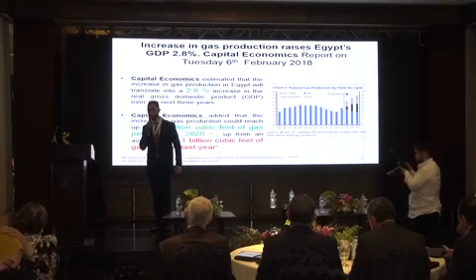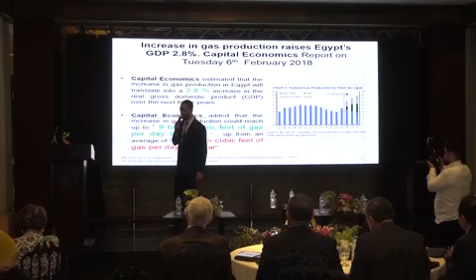From 5 billion up to 9 billion. This could be good news for you, but I will not say sad news, it is worried news, because if you have been awarded your fortune, you will spend all night thinking what I'm going to do with it to have the greatest benefit.

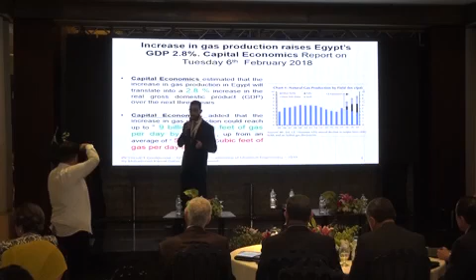So we will need an effective solution, not efficient solution, because you know the difference between efficiency and effective. Efficiency is doing everything the right way, but effective is doing only the right thing. This takes us to an introduction to the gas early production.

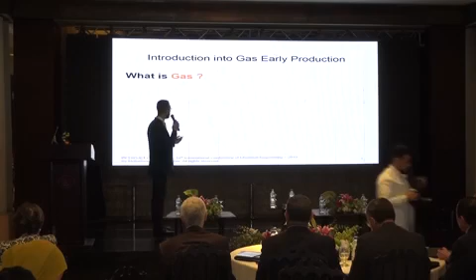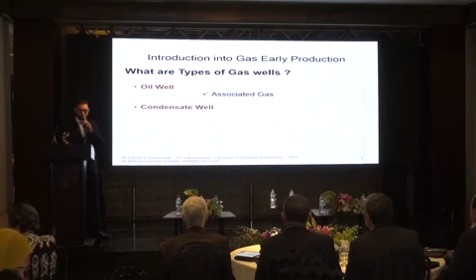Before going to the EPF, we need a small introduction, very simple, about the gas itself - its compositions, its definition, its classification. It's a mixture of hydrocarbons, between hydrogen and carbons, and it could be having some components. I have to also go through the types of gas wells, which are oil well, associated gas, and condensate well, non-associated gas, and gas well, pure gas, and also unassociated gas.

The examples of hydrocarbon components could be CH4, C2H6, and C3, and then going down to the lower and heaviest components, which are C4H10 and IC4. The gas could be classified, as we know, to sales gas, LPG and LNG, and NGL and condensate and removed substance.

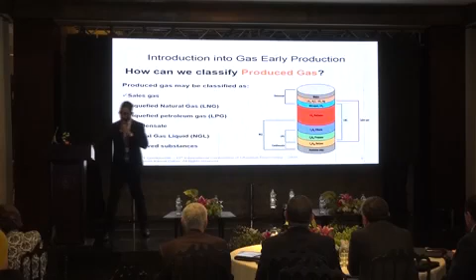The main gas components could be principal components, which are CH4, C2H6, and heaviest components, which are propane and butane. I'm reviewing these items because I will need them through my presentation, for how I'm going to separate these light components from the heaviest components in the most economic and fastest track.

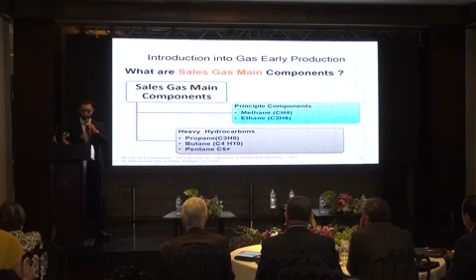The gas processing is simply separating the heaviest from the lightest to produce what is known as gas, as per the client specs.

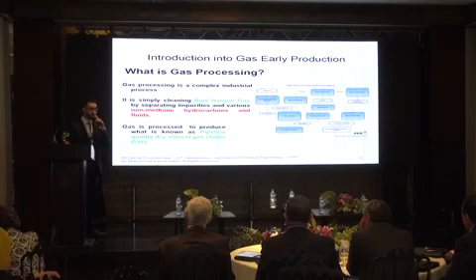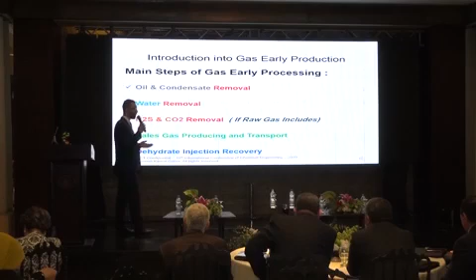The main steps are oil and condensate removal, water removal, H2S and CO2 removal if your gas is sour gas, and then sales gas producing and transport. Of course, there's dehydrate injection recovery, and all of you I think are familiar with the hydrate formation problem which we face when processing and treating our gas.

There is also the Cricondenbar, which is the highest pressure at which liquid and vapor phases could exist together at equilibrium. And Cricondentherm is the highest temperature at which liquid is formed.

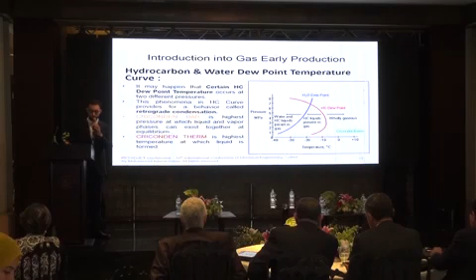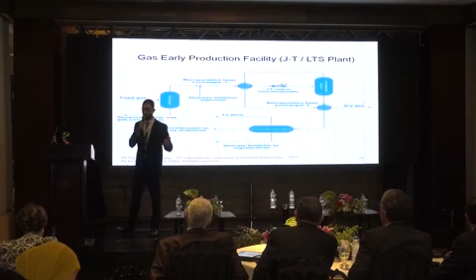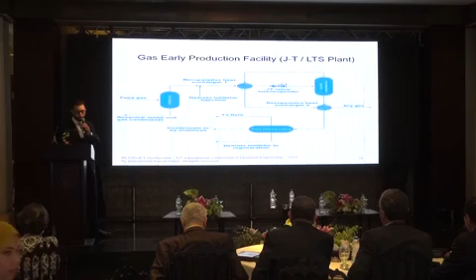So we are gathering some equipment which are skid mounted, as we see: high pressure separator here, and then injection point for the hydrate formation, and then we are having our JT skid.

JT skid, if you are not familiar with this item, it stands for the Joule-Thomson effect. The Joule-Thomson effect is an expansion valve that makes the gas suffer a higher pressure drop, and at this moment it will suffer a higher temperature drop, allowing you to separate the lightest component from the heaviest component through the low temperature separator.

You also have this heat exchanger which works for both targets: heating the separated heaviest components and also making the temperature of the gas reasonable, matching the EGPC gas specs.

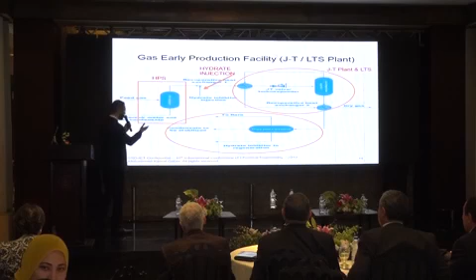Then you have the low temperature separation here for separating the heaviest components, and then the hydrate mixed with water is injected again at this injection point, flaring a small amount of gas. Then you have your dry gas.

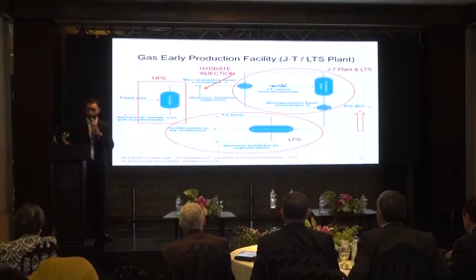This takes us to a case study done through the Unisim software. These were the composition of our gas, as we see here, and these are the conditions, along with the sales gas specs required by the client. Our challenge is to separate the light components, methane and ethane, from the heaviest components, and also to bring these conditions to the required specs.

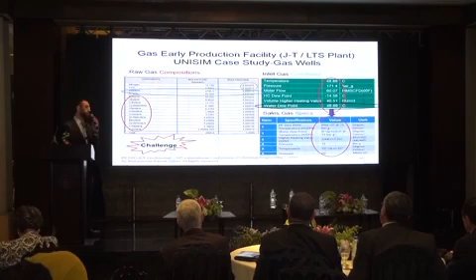The main target here is the dew point temperature of the water, which is around 50 degrees Celsius; it needs to be brought down to around 0 degrees Celsius, while keeping the heating value as it is. So let's do this together.

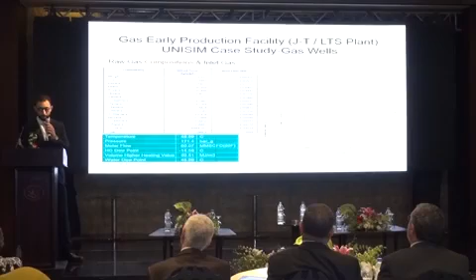These are the conditions and compositions. This is our figure, but keep in mind this figure was considered on a dry basis, so we have to do some saturation with water to make it more real. So this will be our starting point.

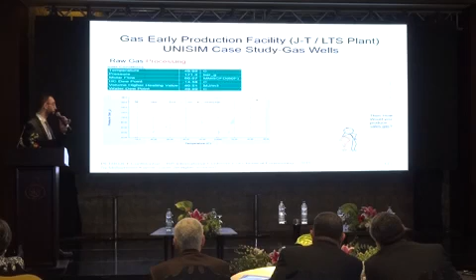We will first remove the heavy components, then remove water and prevent hydrate formation, and then produce sales gas. We do that by bringing this point inside the curve itself to create a two-phase flow, so we can separate the heaviest from the lightest, and then bring the operating point back outside, as we see.

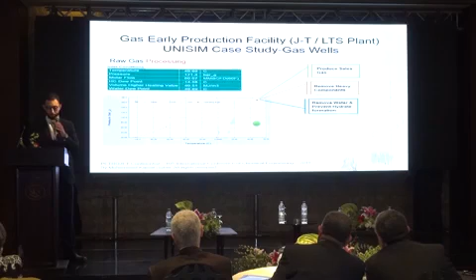So how are we going to do that? This is our process simulation, which is composed of inlet separation, and then you have methanol injection, and you have your JT skid, and then you have your compressor station.

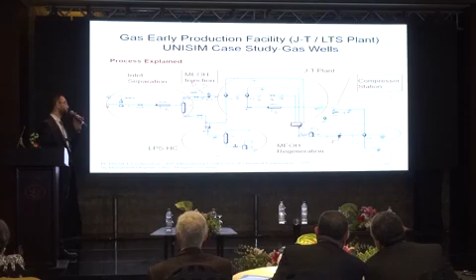The reason we have our compressor station, as I mentioned previously, is that the main phenomenon of the JT skid is to make the gas suffer a higher pressure drop. So you lose pressure, and you have to use a compressor station to match the sales gas specification.

And then we have methanol regeneration to be re-injected. We also have our heavy components, which have been produced through the high pressure separation and the low temperature separation. They are gathered, separated again, and then trucked to be treated further.

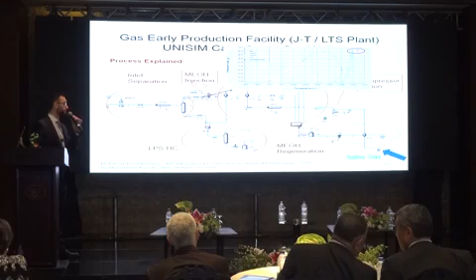Kindly remember the steps: we bring this point inside the curve, and then we bring it back. This is our curve, but notice that the operating point is so close to the dehydration or hydrate formation curve, so we will have to do dehydration to address the hydrate problem.

This is our formation temperature for the hydrate. It's around 18, a close temperature.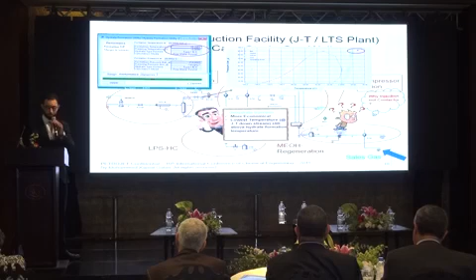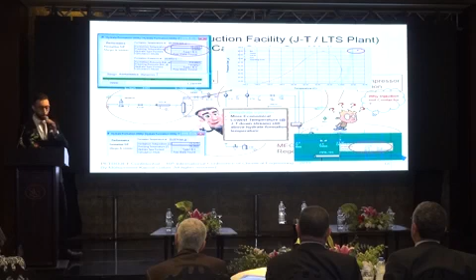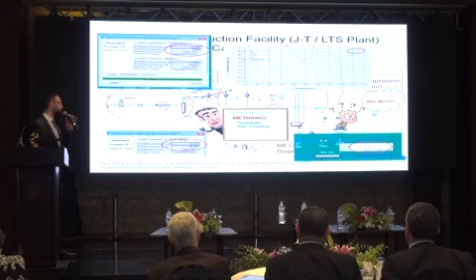A question might come to mind: why use methanol and not ethylene glycol, since it's the cheapest one? I will not say cheapest — I don't like to use this item. Methanol is more economical for re-injection, for anti-freezing, and also cheaper for regeneration.

Then what? As we reviewed together, we have inlet separation, we have methanol. After doing the injection, our curve turned out like that. As you can notice, our operating point appears to be further away.

But in fact, the operating point is the same; it's the curve itself that has shifted to the left side, sorry for that. Our formation temperature turned out to go from 18 down to minus 3 Celsius degrees.

Our JT skid, in fact, is formed by two heat exchangers having these specifications, and also a JT valve having this specification.

Sorry, I'm going so fast because I know that you are not interested anymore in my presentation. You are hungry now. I'm also hungry.

This is our low temperature separation, which has these specs. Some features from our UniSim design software include quick sizing, so we can figure out the size, the volume, the diameter, the length, and so on. We also have the boot and the weir, the position and the physical height.

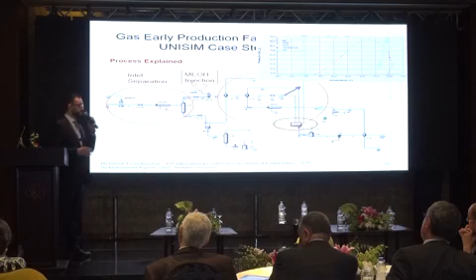Then our curve turns out to be like that. If you notice, your operating point got into or inside the curve itself, but this is not enough. You have to do separation.

After doing the separation, you have your heaviest component, which will be separated through a low pressure separator hydrocarbon. These were the molar flow of them, and these are the compositions of them. This is your operating point, but this operating point is not for the gas.

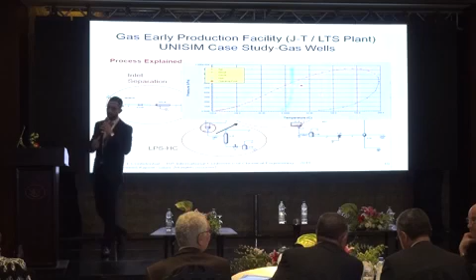Can I ask you a question? This operating point, is it for the gas or for the liquid? I think this operating point is for the liquid itself, not for the gas, so it is on the left side. After that, you will be doing a separation for it. Yes, it is inside the curve, of course.

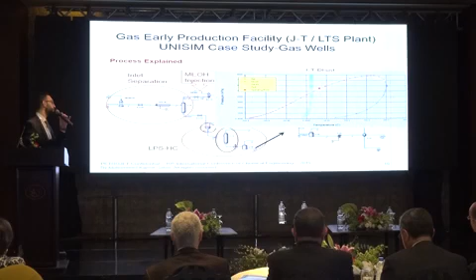So I will do some separation after inserting a low pressure separator around rating 150 for the flange. You will have your point outside the curve, so you have it in the liquid form. You can transfer it by trucks or pipeline or whatever facility is available.

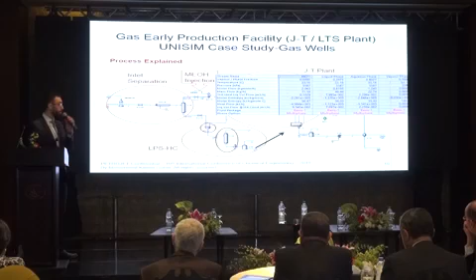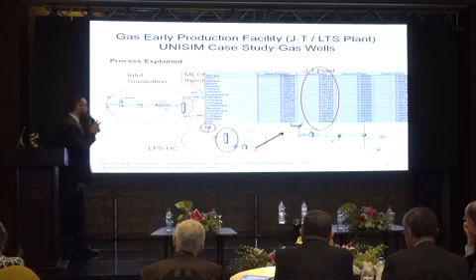Then let's go back. These are your mass flow rate, and this is your composition, mainly composed of methane and ethane. What is our main concern here? Our main concern is to look for...

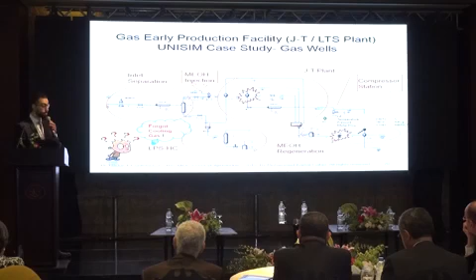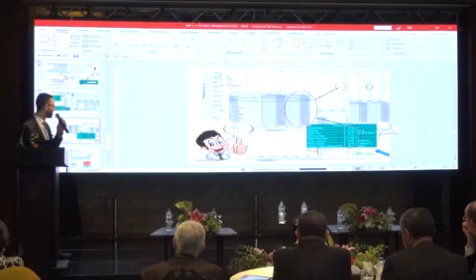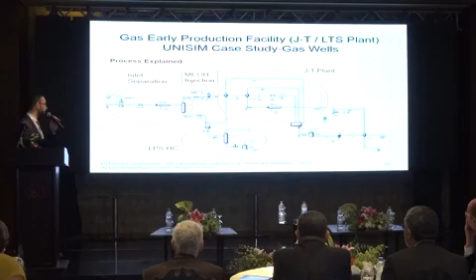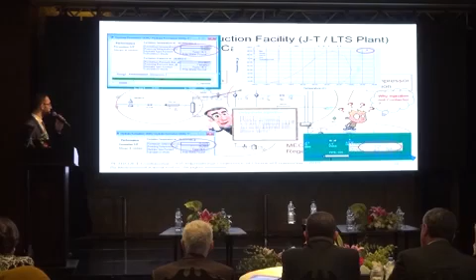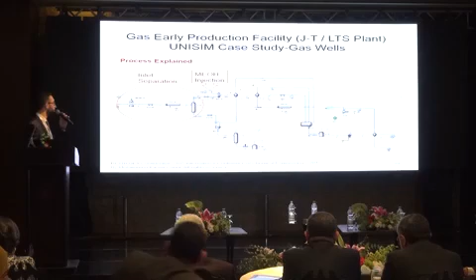Okay, we moved through this, and we have our injection and dehydration. Mohammed, yes, go to the conclusion directly. Okay, I will go, sorry for that. But I'm just trying to make my point as effective as possible.

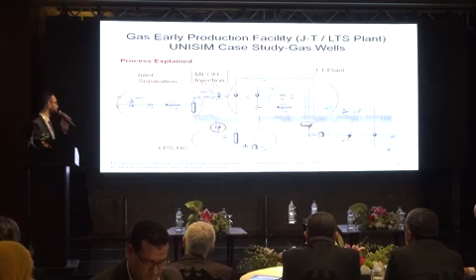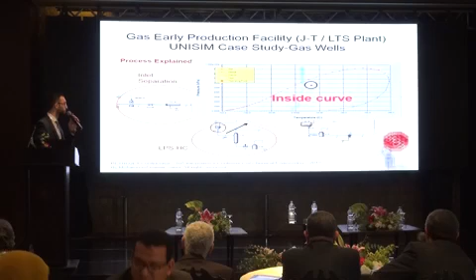This is our operating point as we reviewed together, and this is our composition and conditions. I know it is more technical, but I wanted to make it more beneficial for you, because I know that most of you are chemical engineers. That's my point, I'm not just wasting time.

Nobody believes that you are a mechanical engineer. We thought that you are a process engineer. Yes, I'm having a master's degree from India in piping engineering, this is why I'm interested in that.

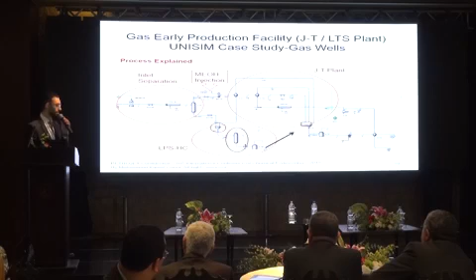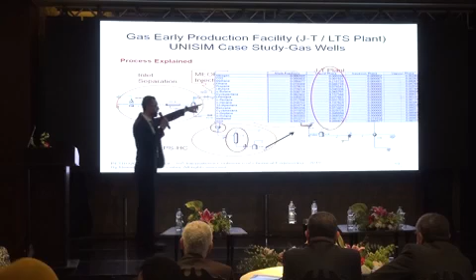These are compositions. What I was going to ask you, what is your main concern here? I think we could be looking at the ethane and methane composition. As you see here in the liquid phase, you are having very low composition, which means that your liquid is already separated.

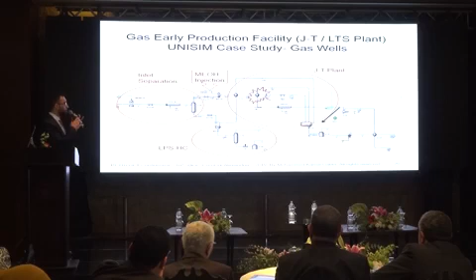Then this is your point which we were talking about, still very close to the curve itself. So you will need to do more heating, heating the gas through this heat exchanger. You will have your point in this position, which is outside the curve.

But still, these conditions do not match the specs of the EGPC, so you will need to do out of spec. You will need to do a compressor station. After doing the compression, you have your operating point around 3.5, and your pressure is around 73.

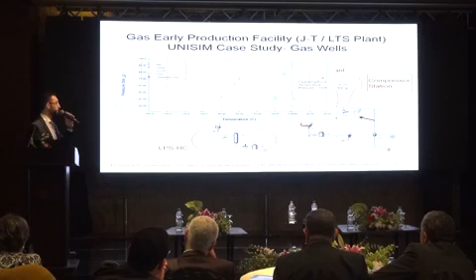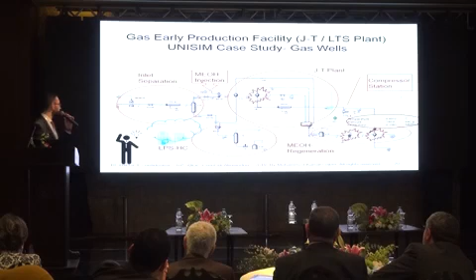Then the methanol regeneration, as we see, the temperature is very low and the pressure also is not matching, so we will need to increase the temperature. At the same time, you will need to cool the gas. Instead of having a cooler and a heater, we use the heat exchanger here to do both functions at the same time. Then you have your composition in the aqueous state.

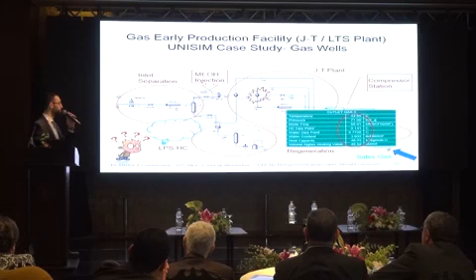Then you are having your sales gas with these conditions: temperature, pressure, molar flow rate, and this is the operating point. You need to check for the gas composition, it's okay. 93% is methane. Finally, the gas is on spec.

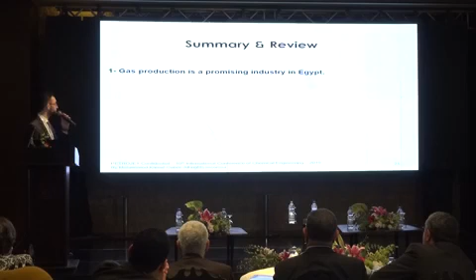I'm just summarizing and reviewing my presentation. We have reviewed together that gas production is a promising industry in Egypt, and Capital Economics has estimated that we are being blessed, our production is almost doubled.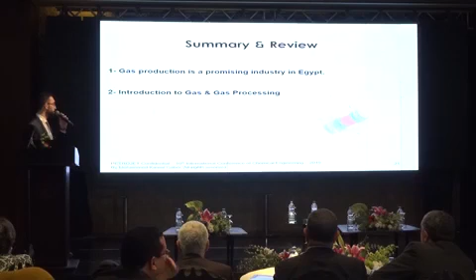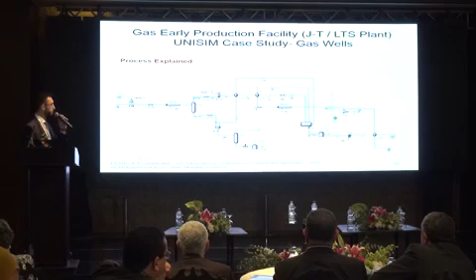I also had an introduction on gas processing. We have reviewed this figure together, and we have reviewed the main components and equipment for the gas early production facility, as we see here. We have also reviewed our process, and we had our gas. I'm just trying to review with you.

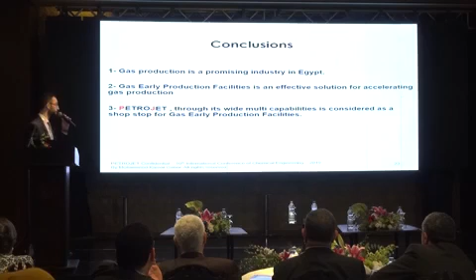The conclusion: gas production is a promising industry. Gas early production facility is an effective solution for accelerating gas production, and Petrojet, through its wide multi-capabilities, is considered a one stop shop for gas early production facility. Many thanks for your attention, and these are my contacts.